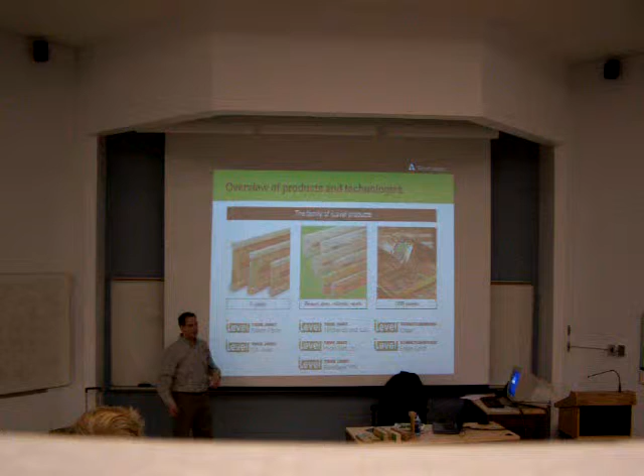A separate company. So we still want to keep that brand name recognition. So as you see throughout our literature, Truss Joist is still mixed in there, but it's not a standalone company.

In the beam products, or what we call rectangular sections, we use that same technology to do a variety of products: beams, rim boards, columns, and studs. And again, the three technologies that I spoke of, and I'll go into a little bit more detail after. And then we also manufacture OSB panels.

Okay, so here's an example of an OSB. We would use this typically as a floor sheeting, or as a wall sheeting, or as a roof sheeting on top of your trusses. We have two brands, Edge and Edge Gold. I won't spend a lot of time on that today, but Edge is basically the commodity, everyday flavor of OSB.

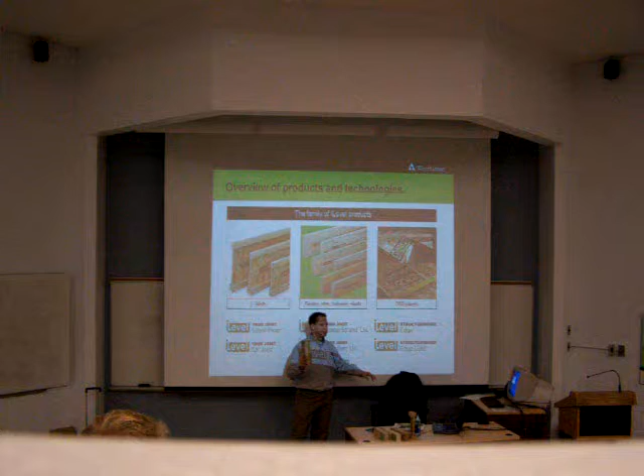Edge Gold is kind of a value-added panel, a higher performing panel with different glues and resins, so it resists weathering better, so the edges don't swell, has a bigger warranty, different stuff like that.

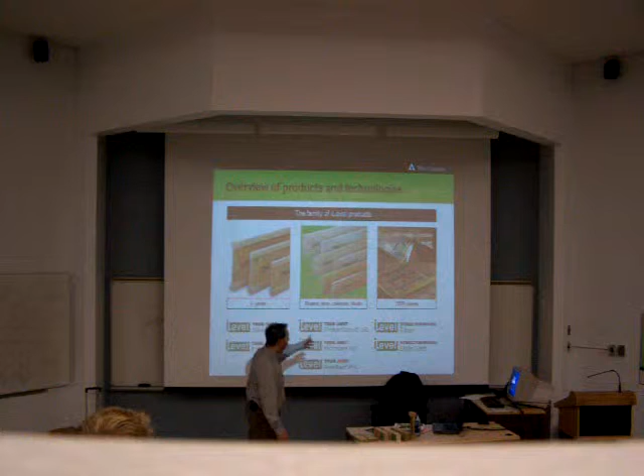So we really have the whole package, and we have a whole set of tools and literature and a full library, all kinds of information that helps specifiers and designers and what have you work with our products. Any questions at all?

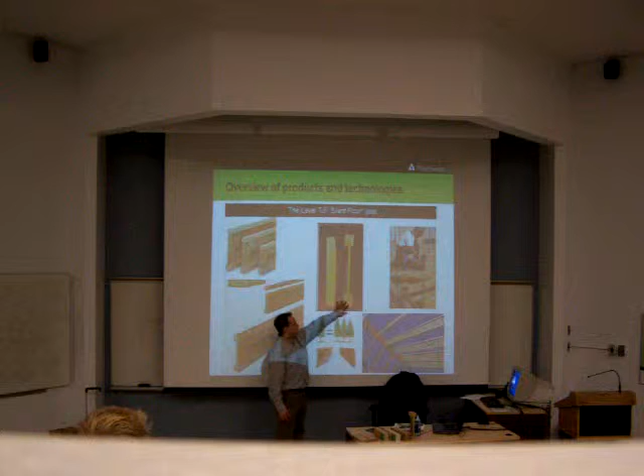Good. All right. So here's an overview of the I-joist, what we call the TJI. Again, to recap, part of the reason for creating it was to eliminate some of the imperfections. You see some cupping and cracking, some splitting. An I-joist, because of the way it's manufactured, we can control the integrity of this panel. We can control the strength of all of these flanges.

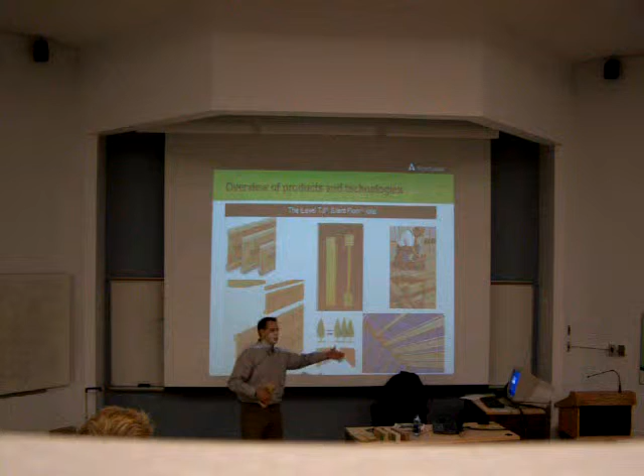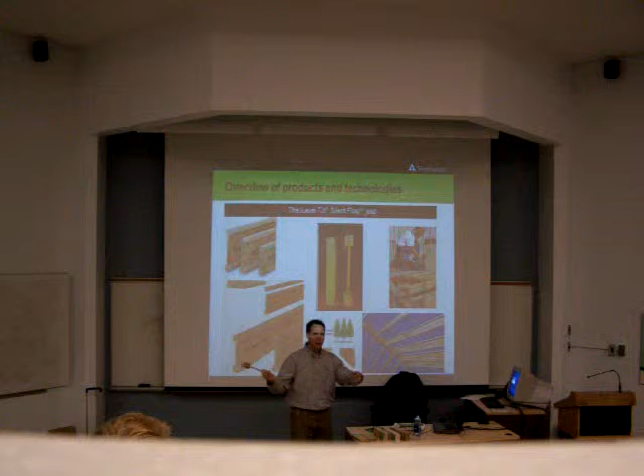So we can make essentially every I-joist that we make virtually the same strength. So there's not a big variability from one joist to the other. You won't get the shrinkage and twisting and warping and cracking that you would with traditional solid sawn lumber. So from a floor performance standpoint, a lot easier to design, a lot easier to build with, because every piece is usable. You don't have one that's all crooked you've got to throw in a dumpster.

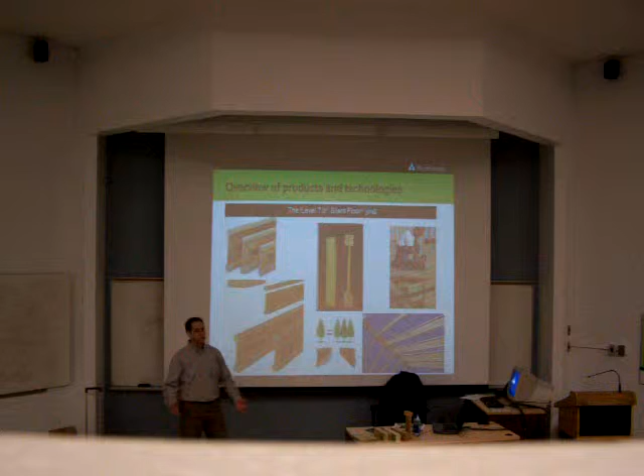And far more predictable for floor performance. So builders like it because they know what to expect for their homes, for the homeowners later. Products such as that come with warranties attached to them, so it gives some peace of mind to the homeowner long term. So there's a bunch of advantages to engineered wood in general, and in Ottawa, for example, or in this market, I'd say 99% of what gets built residentially will be with engineered wood like that. Very little solid sawn lumber in this market.

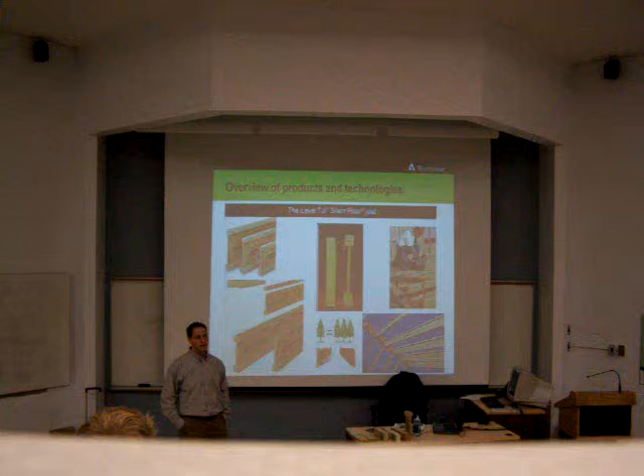Some markets like Toronto would still have quite a bit of 2x material, simply because a lot of the homes are much smaller, the lots are so small, so they could actually, in many cases, still get by with a 2x8 as a floor joist, because the spans are so short. That being said, a 2x8 is significantly less expensive than your average I-joist, so it's a question of dollars and cents why they still use, in some markets, solid sawn lumber, but generally speaking, it's mostly engineered wood.

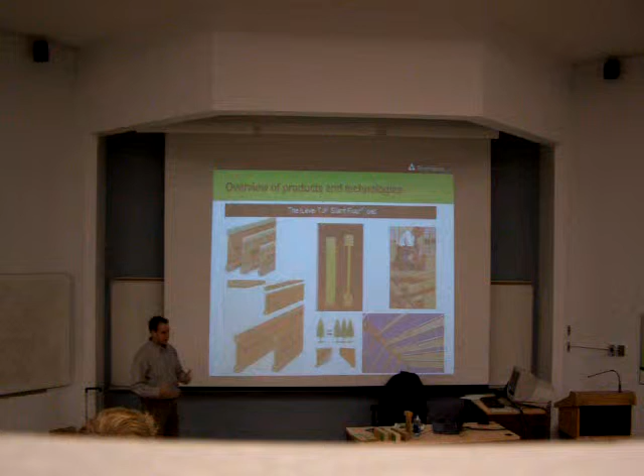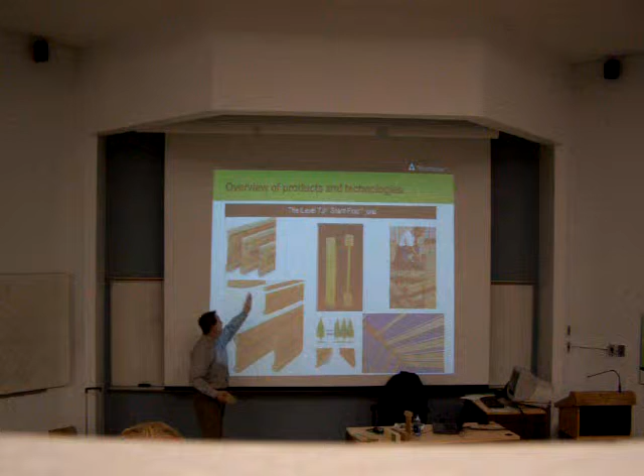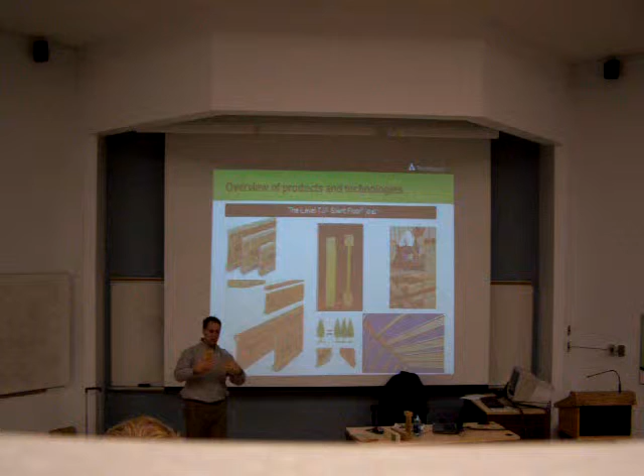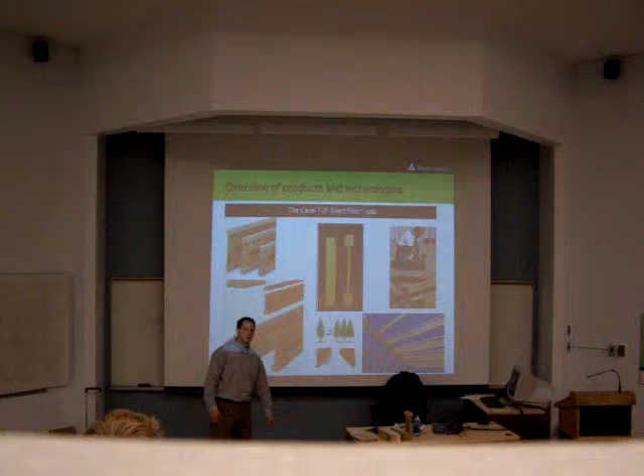The web is kind of interlocked. You see it on this short sample, there's kind of like a zigzag pattern to the web, and there's glue inside, and it's locked in place, and it just runs like a sausage. So we're really limited by trucking for the length that we would ship out. Most commonly, we'd see forties in a typical lumber yard. So they buy really long lengths because that's all on a flatbed truck, and then they cut it down to length depending on what's needed in that given floor package.

Okay. So an I-joist can also be used as a roof joist. Here's a snapshot of it there. Some particular details when it comes to roof framing. Because you're dealing with an I profile, there's some limits to what you can do versus the traditional old school stick frame type roofs. Very difficult to accomplish that with an I-joist, so typically you should shy away from that. We'll get into some of the roof details a little bit later. But some clear-cut advantages to using an I-joist in a roof system.

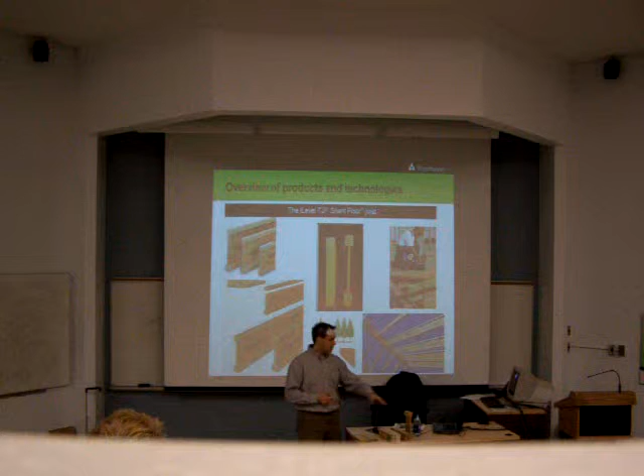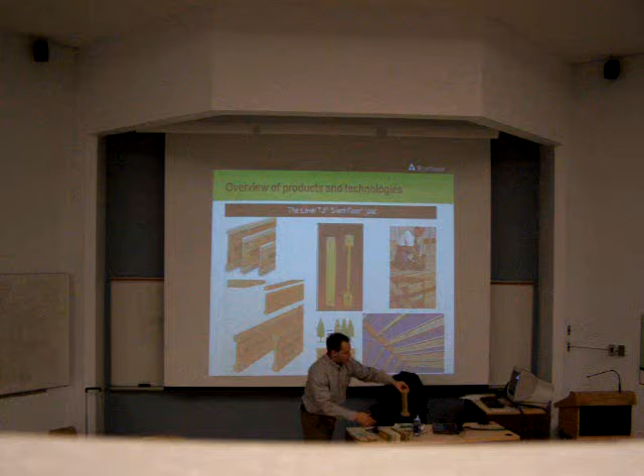Floor performance isn't so much of an issue because it's on the roof, nobody's walking on it usually, but the depth is a big bonus. You can get an I-joist anywhere from 9.5 to 16 inches deep, which is kind of the everyday items. You can even get it 18 and 20 inches deep. So that would give you plenty of room to insulate and still have room for ventilation. If you have a 16-inch deep I-joist, you can have your R40 or R50 and still have room for ventilation. Okay.

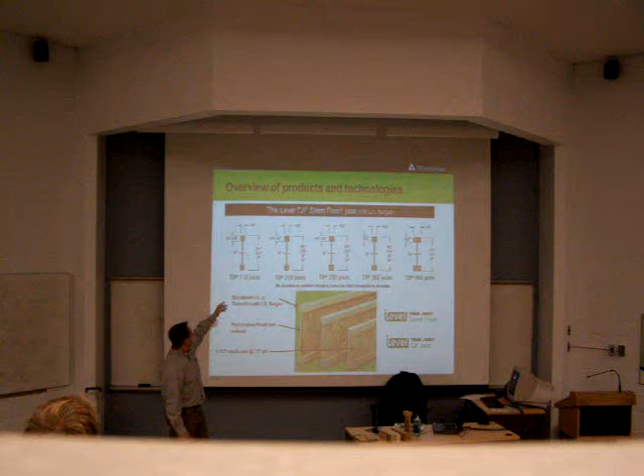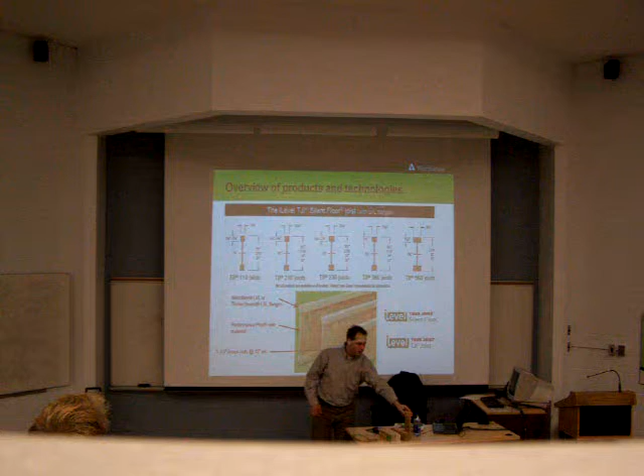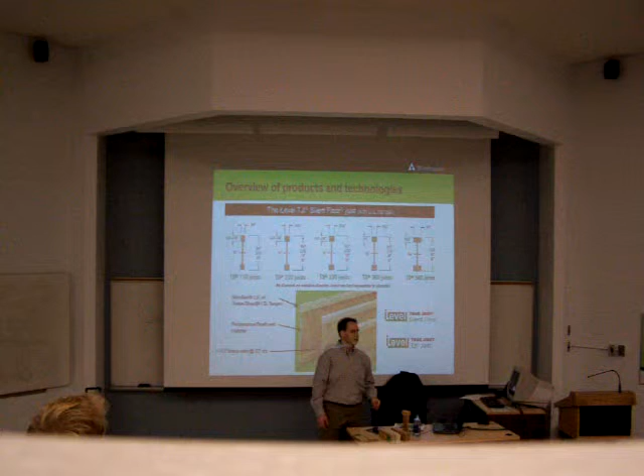So here's just a quick snapshot of one of our product lines here. This is the LVL flange. And again, it has different widths of flanges for the most part. The flange width isn't always the indicator of its strength. You'll notice that our 230 model and our 360 model are basically the same size, 2 and 5/16 wide, but the grade of LVL is different. Okay, so don't be fooled by two I-joists side by side that they're the same strength and they're just interchangeable, not necessarily. And the same goes for solid sawn lumber.

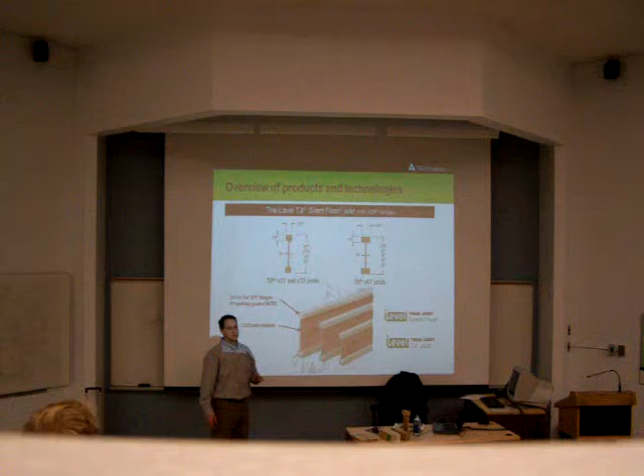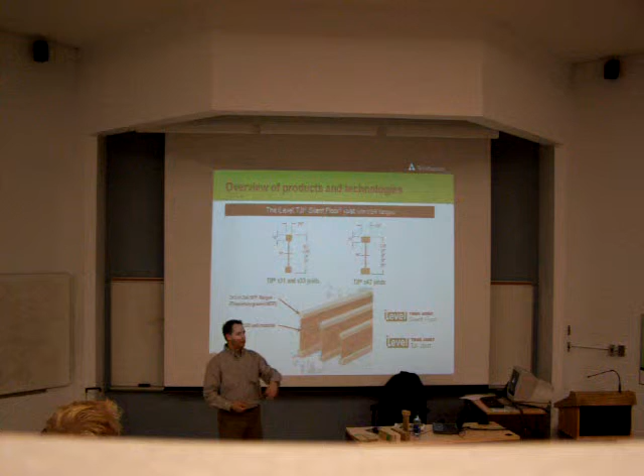Same goes for this, another line that we have with 2x3 or 2x4 flanges. Every joist out there has proprietary design values. So the grade of the 2x3 or the 2x4 are not the same from one manufacturer to another. Everybody has proprietary grades. So it's not all number 1s and 2s. Put a bit of glue and you run through your router and add a bit of salt and pepper and boom, you have a joist.

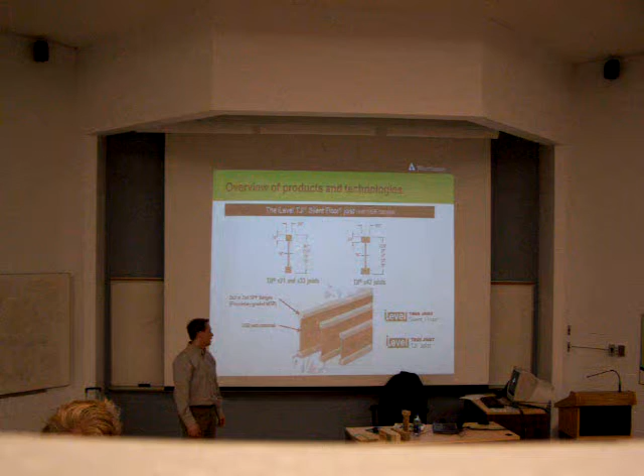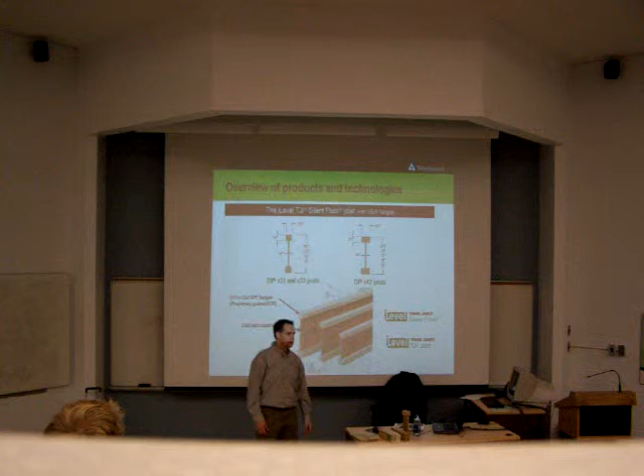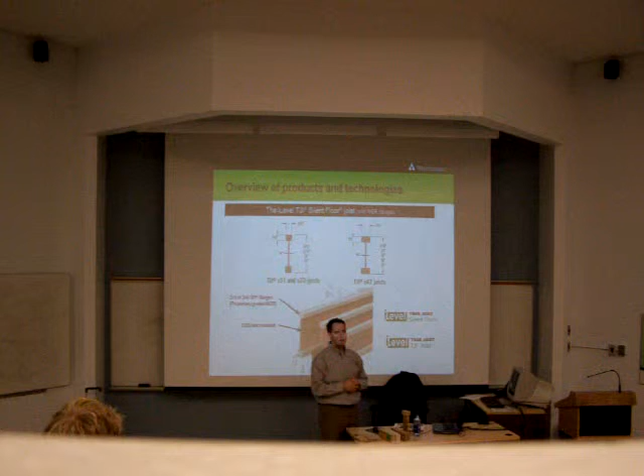There's a lot of technical stuff in there, the type of resins, the shape of the route, and all kinds of stuff like that. So in our case, we use MSR grade flanges in our I-joists. So each and every piece of wood is machine stress rated. MSR, that's the acronym. Which is much different than the average 2x4 that you'll find in your wall framing, which would be a number 1 and 2 or 2 and better. So there's a variety of grades of lumber, and there's typically specific grades that are used in an I-joist, and every manufacturer has a proprietary grade.

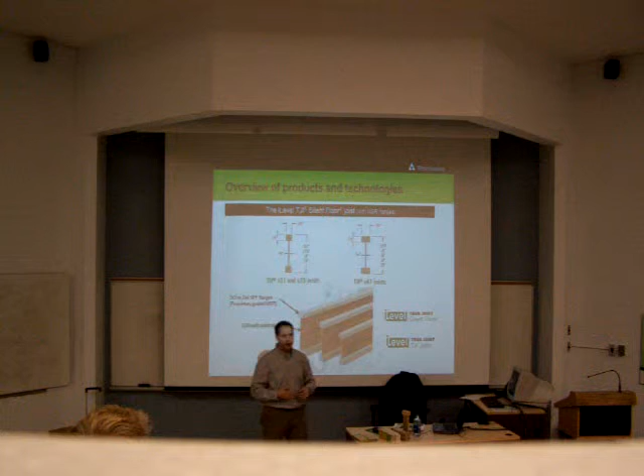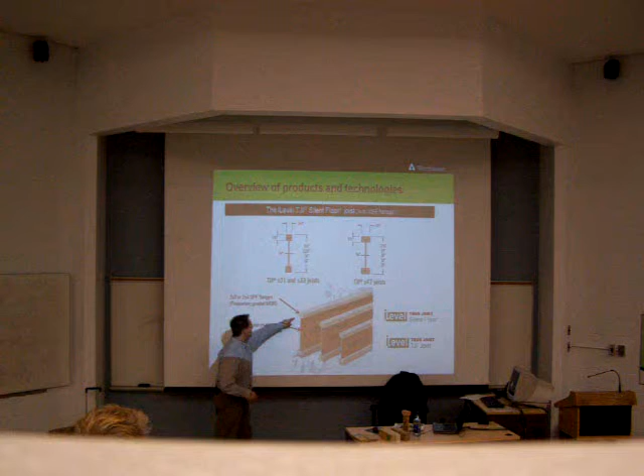Same goes for the OSB that's inside the web here. That as well is a web stock, specially designed for higher strength in shear and stuff like that. So we'll get into this a little bit later. So that's an overview of what an I-joist is. So terminology, this would be what we call the flange or the chord, top and bottom flange. This would be the web. Okay, so that's kind of industry standard stuff.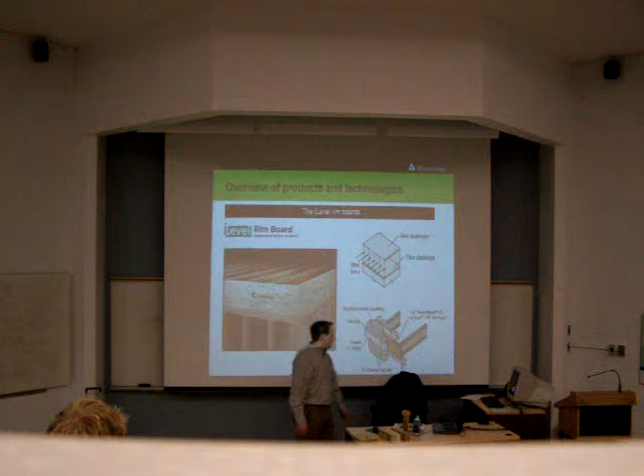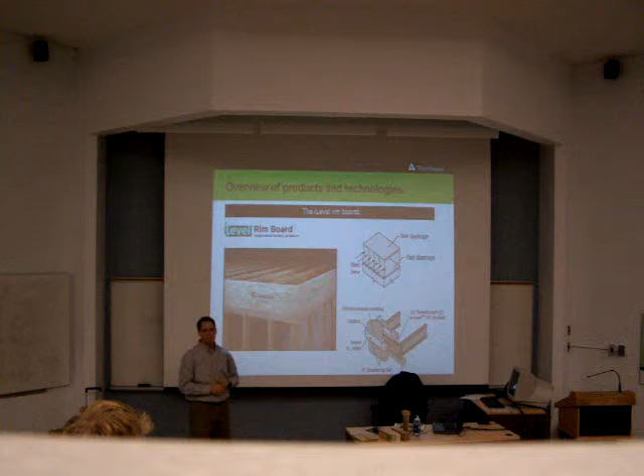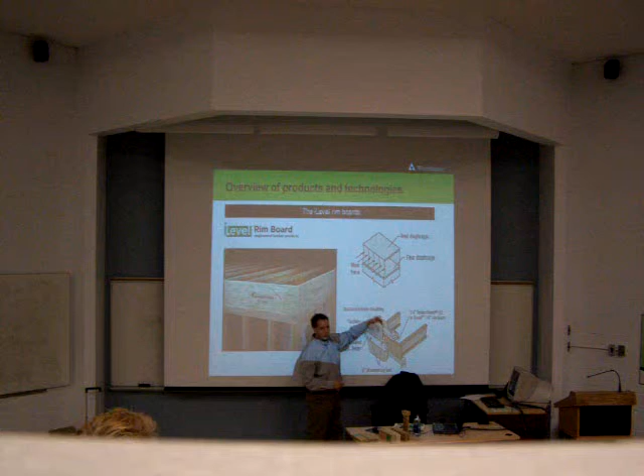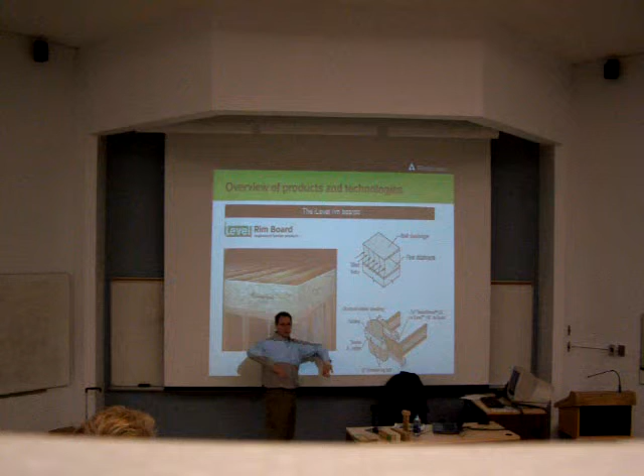Rim board, like I said, we manufacture a rim board as well. We make it out of TimberStrand. And the rim typically will do the outside perimeter of your floor framing. It plays a very important role when it comes to vertical load transfer. So all your exterior walls that come down, carrying roof load or what have you from above, it all gets passed through the rim board down into the foundation. The fastening of the rim board on the wall below or on the sill plate around the foundation is what helps keep the building on the foundation.

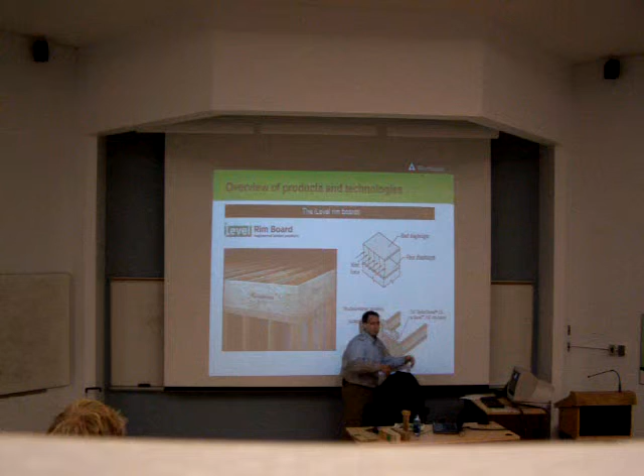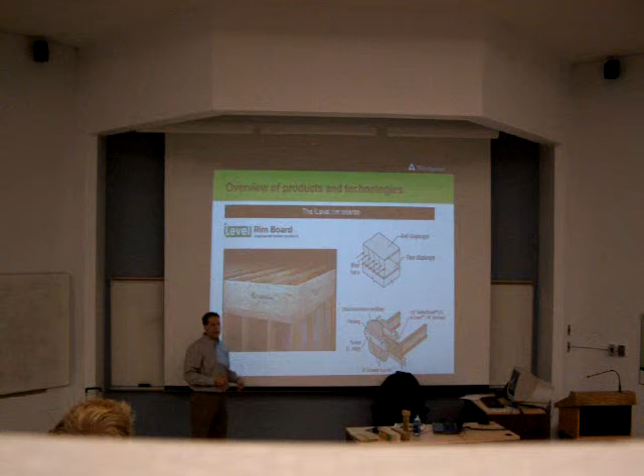So when the wind blows over here, the rim board that's nailed all along this wall is what's preventing the building from getting blown off the foundation. Okay, so the rim board, very, very important. There's a few different details that can be done for an outside perimeter. You can actually use an I-joist as an outside perimeter as well. It just doesn't have as much vertical load carrying capacity. It's a little finicky, a little bit harder to frame with.

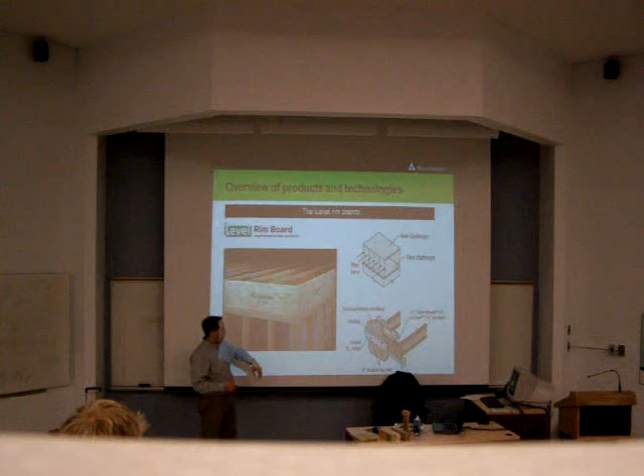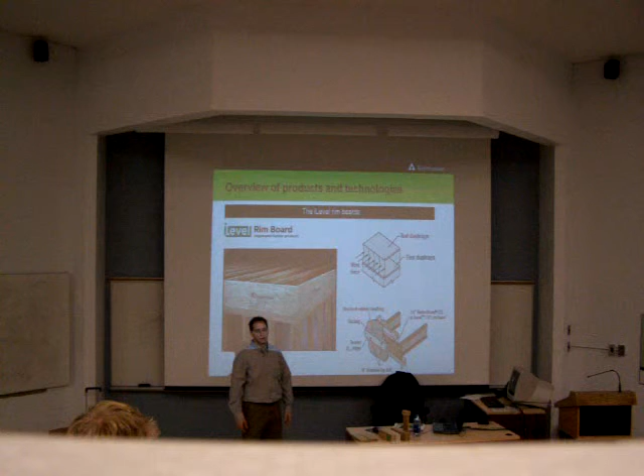When you want to put your exterior finish, for example, you want to have something solid to nail to. If you want to lag on a deck, you can anchor that to a piece of rim board, where it's not the same with an I-joist. So most of the time you'll end up seeing a rim board, but it's not necessarily mandatory. So that was the I-joist. Now into the rectangular products, a little bit more detail. Start with Timber...